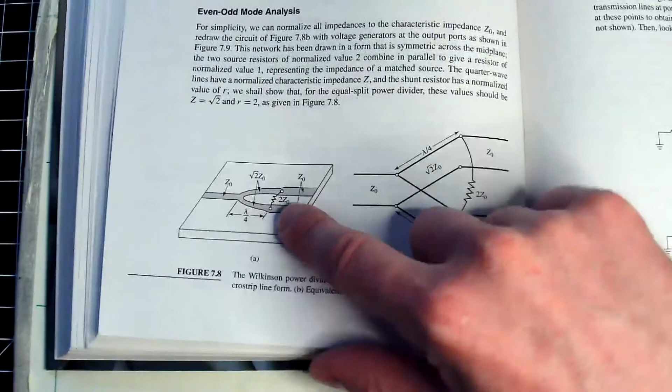And then to get the lower impedance, it's a slightly thicker strip. So this would be like 50 ohms, this would be something like 70-ish ohms, so a smidge thinner, and then it thickens up back to 50 ohms again. Then you would just slap a resistor across it right here.

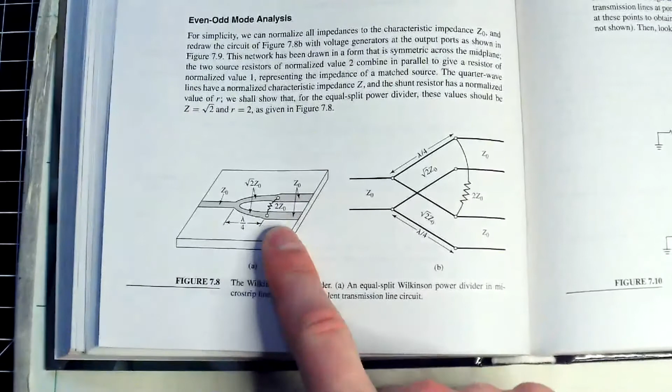I was almost thinking about whether or not it'd be worth trying to make this in real time, because theoretically the analysis is pretty straightforward. But I've got a board here, a soldering iron, and we have a half hour to kill. So what if we tried to actually make one right now? How would that work?

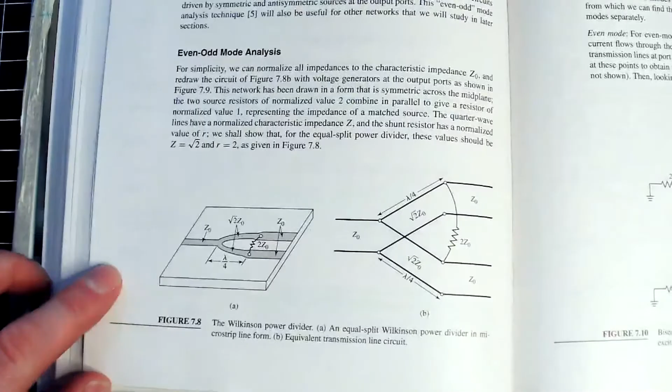So we'll go through the theory section. If we get really motivated, I can fire up the soldering iron and see if we can actually make something like that, and measure it with our nano VNA to see what happens. Or at the very least, I could get through half of it and we'll look at it Friday and see how that goes.

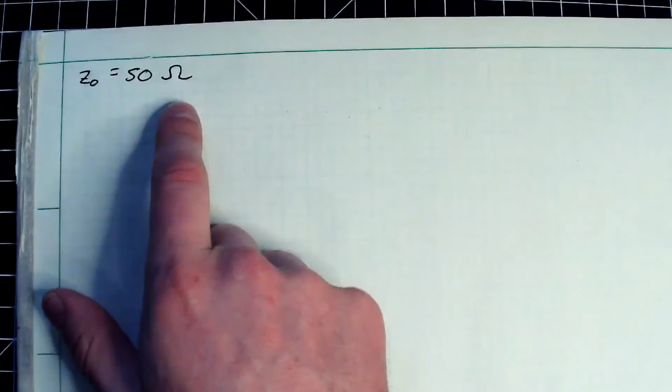So the question was, we're working with microstrip. The first thing we need to know is what the thickness of our microstrip is going to be. So if I have, say, a 50 ohm line... let me pull up, oh, I was supposed to say 50 ohms, I gave the center frequency but forgot to do the actual impedances of everything. So we're going to assume 50 ohms, because that's how everything is.

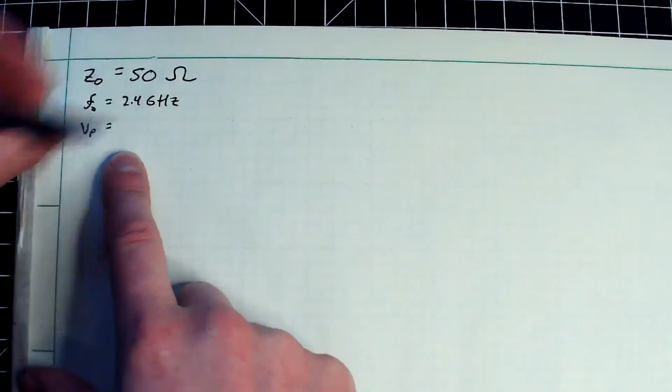We also know our center frequency is going to be 2.4 gigahertz, because that's where everyone's cell phones are. And we know, using microstrip, that at least for our particular boards, our propagation velocity was about 0.55 times the speed of light. That implies the wavelength is the velocity divided by the frequency.

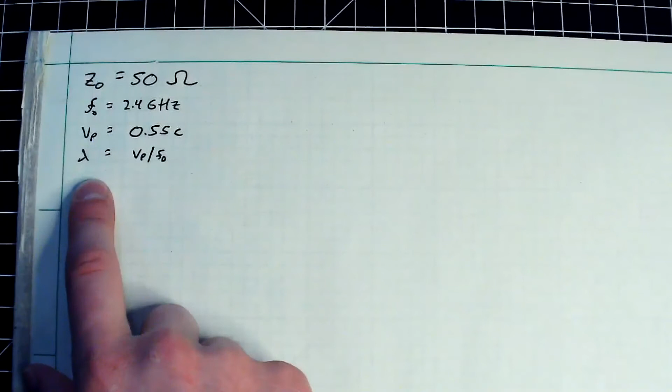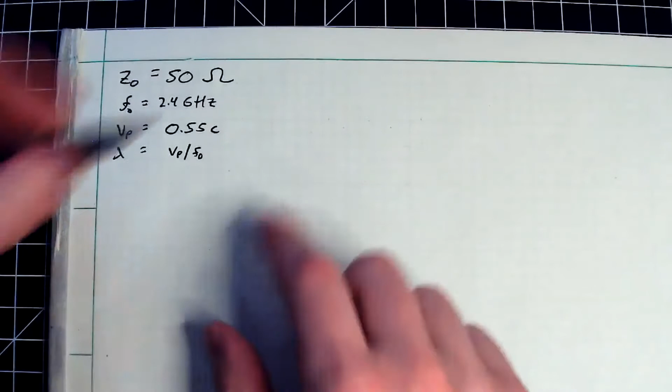We also know we're going to need a resistor. Sorry, I've got too much stuff over here. There's going to be a resistor R, that little bridge resistor is just going to be 2 times Z naught. So that's a 100 ohm resistor that's going to have to bridge that.

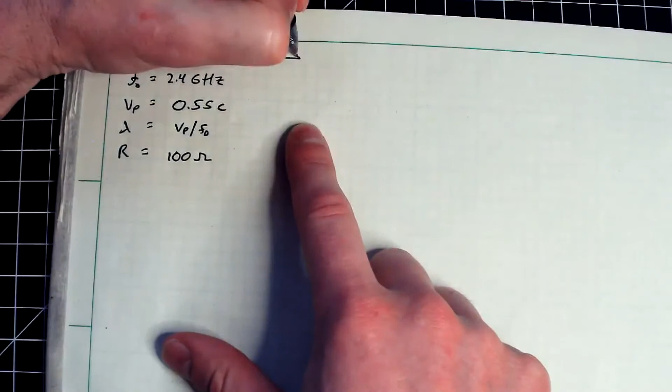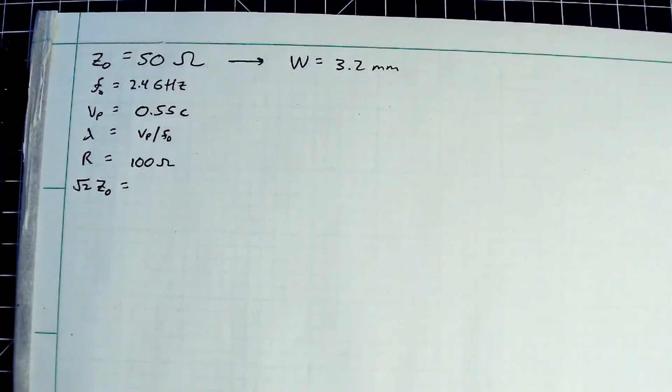And we know 50 ohms corresponded to something like 3.2 millimeters, 3.1, 3.2, I think that was about it. So then we also know the little bridge here has a square root of 2 times Z naught. Let me do a quick calculation in MATLAB: square root of 2 times 50 is 70.7 ohms.

So then the question is, what width do I need for my strip to get that? It's going to be somewhere like 2.5-ish millimeters, a little bit thinner, somewhere between 2.5 to 3, and we'll look that up in a second. And we also know that this length, this little branch here, has to be a quarter wavelength.

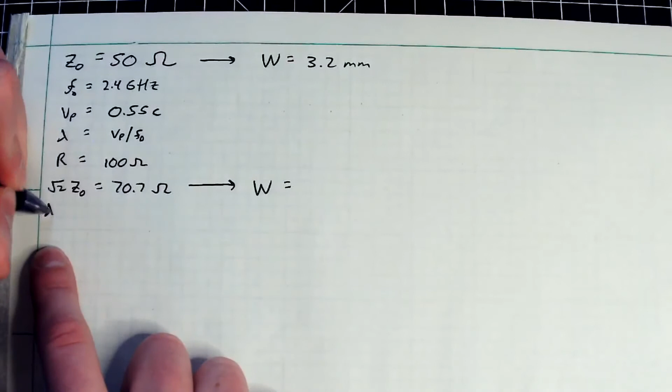So assuming the velocity of propagation doesn't change significantly, we know that lambda over 4 is going to be... well, we've got to calculate this stuff. So frequency is 2.4 gigahertz.

Velocity of propagation, so let's just write a quick little script file that does all this stuff. I'm going to open up MATLAB real fast. Are we on lecture 29 right now? Yes, okay, I'm in the right directory here. Let's do a little screen share.

Okay, so let's just find the model parameters here. We know our frequency was 2.4, velocity of propagation was 0.55, characteristic impedance was 50 ohms. What do we want to call Zx for the little branching guys? We'll just say square root of 2 times Z naught. And we need a wavelength, so that's Vp over F naught. Then L, the length of the branch, was just lambda over 4. So these are all the basic parameters here.

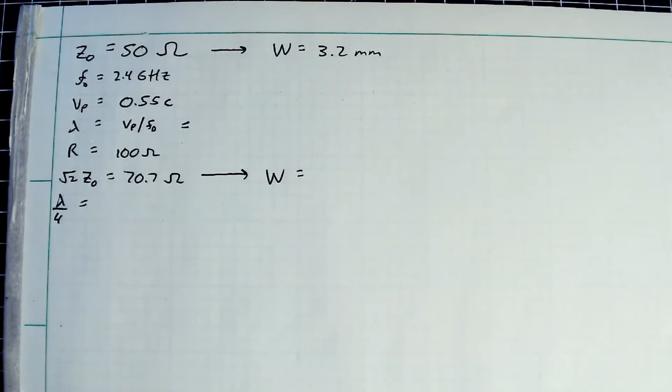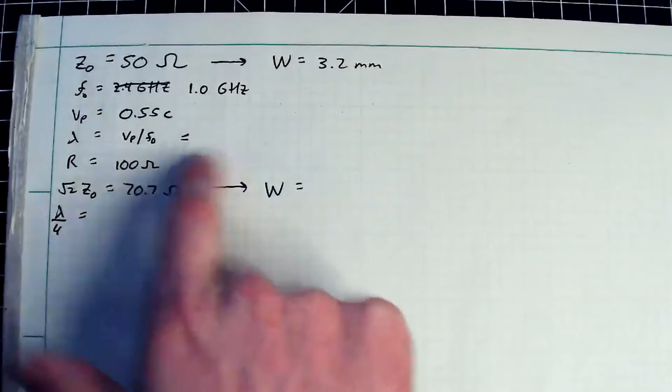Okay, so let's see, we're looking here. I'm going to cross that out, I'm going to put 1 gigahertz now, so the NanoVNA can actually play with it. And then lambda, here we go, so lambda became 16.5 centimeters. And so lambda over 4 is, there we go, about 4.12 centimeters.

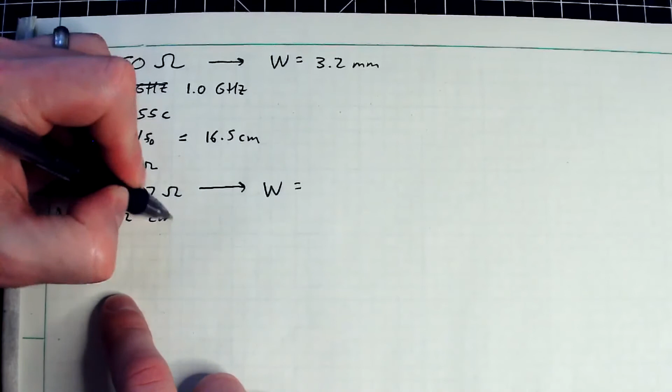So the final question is, what is the width here going to have to be in order to make that little guy be the right impedance? So now we've got to go back to lab 4, I think, where we did the microstrip. So I'm just going to run that real quick and we'll do another screen share.

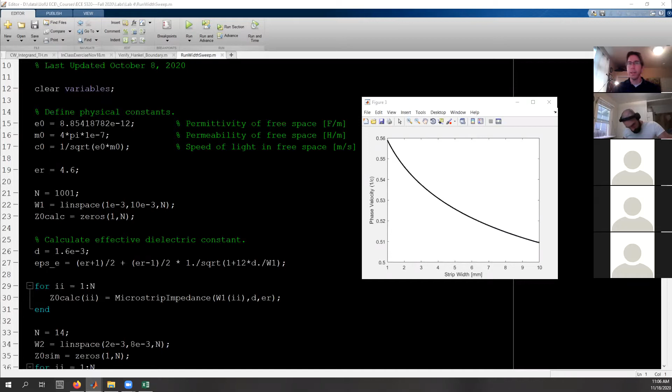So you remember this graph here? Nope, that was our phase velocity, so we can assume that's not going to change too much. And where the heck was that? There we go, so this was... I got all this goofy annotation all over that, so I'm going to remove some of that stuff.

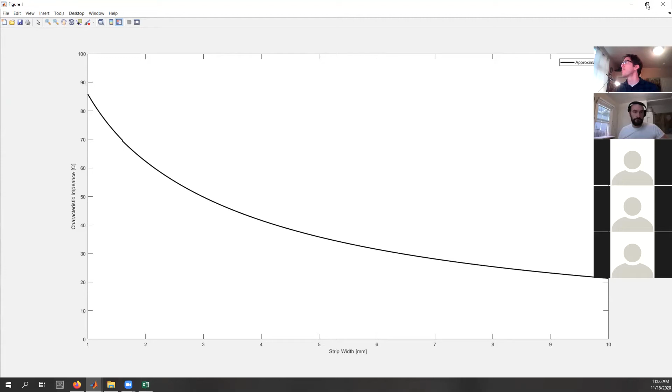Sorry, because I originally had it set up where it'd run a simulation, and I was kind of comparing against that. All right, so remember this, we had characteristic impedance versus our width, and we had about 50 ohms. And then we need to figure out... ooh, that's going to be really thin. I wonder if that's even doable with my bare hands.

So let's do a quick little check here. So there's my 50 ohms there. I'm going to do another one with square root of 2 times that. There you go, so you see there's our two little intersection points. Ooh, that's going to be tough. So you see, to get our 70-ish ohms, I'm going to need 1.5 millimeters. Ugh, I wonder if I can do that with my bare hands. That's going to be tiny.

But there you go, so we know that the width here had to be about 3-ish millimeters. So actually it's not quite... yeah. And then this guy is... we'll zoom back up. So we'll say 1.5 millimeters there, 1.5.

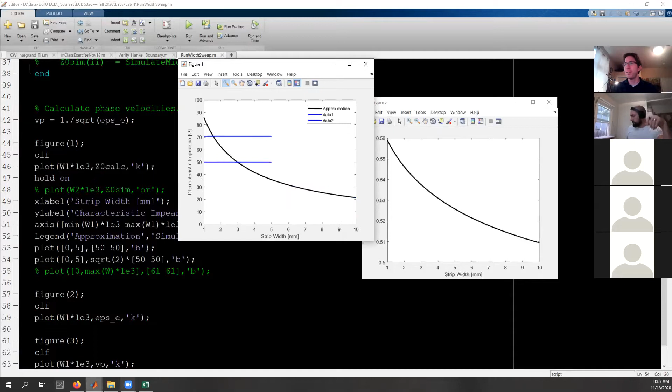Okay, so there you go. That's essentially a Wilkinson power divider in a nutshell - those are the parameters. So we'll go back here. This is everything you need to know.

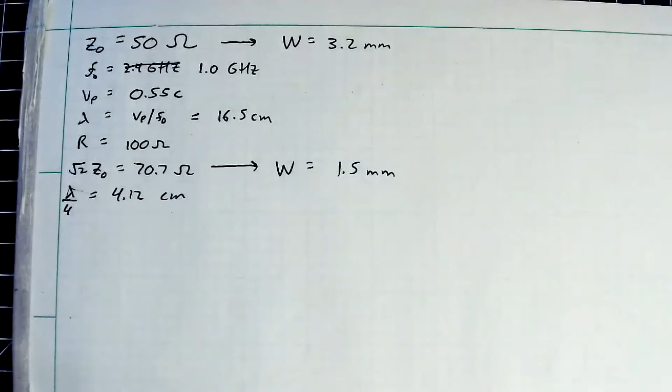You know that this length will have to be 4 centimeters, and these are the widths here. So let's see if I can draw this to scale. You'll have a width coming in like that - I'll call that W1 and W2. That's about 3 millimeters, 3-ish. I think I updated it with my actual dielectric constant, so I'm going to put about 3 there.

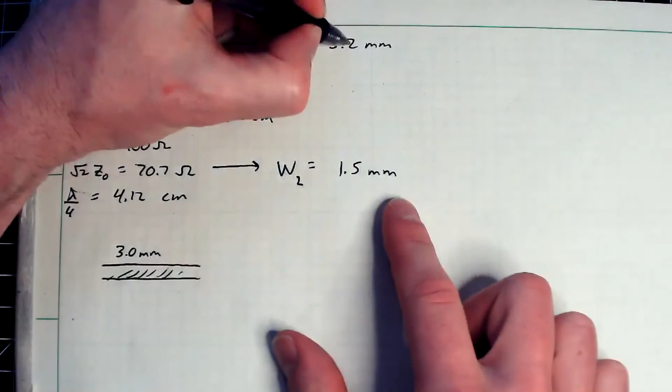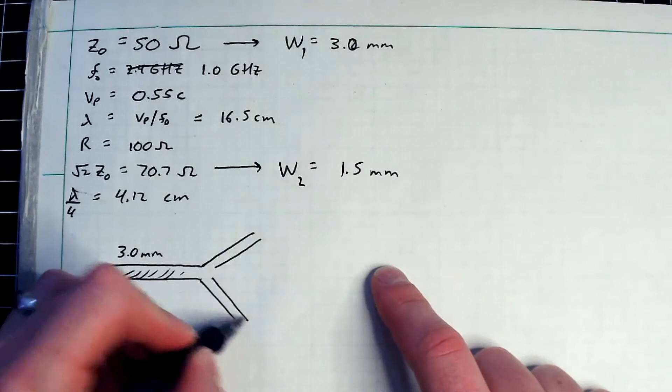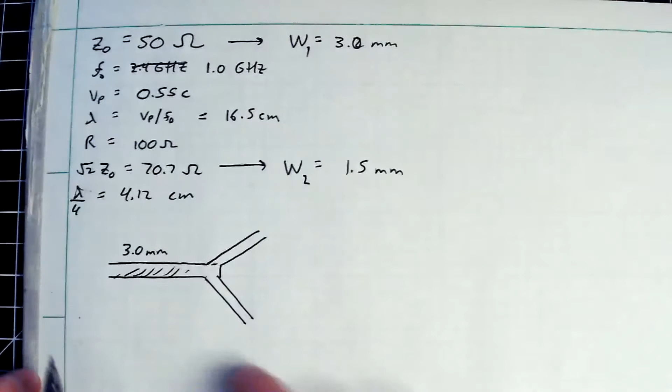And then you have to branch out, so you do something kind of like this. Like that, so you'd have these little branches. I wonder how much of an impact it has, where exactly those overlaps are. But usually this stuff is pretty forgiving if you're making it out of this material. And then you have another bit coming out basically like that.

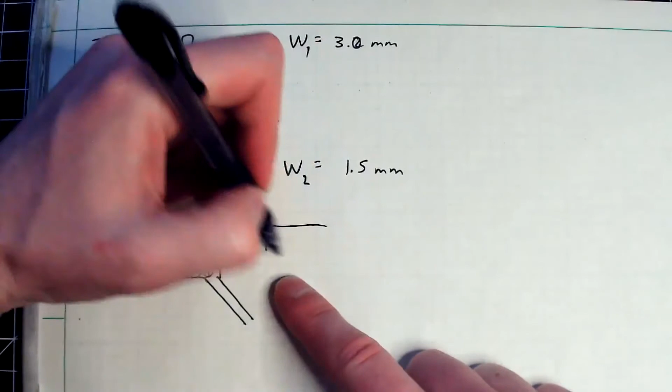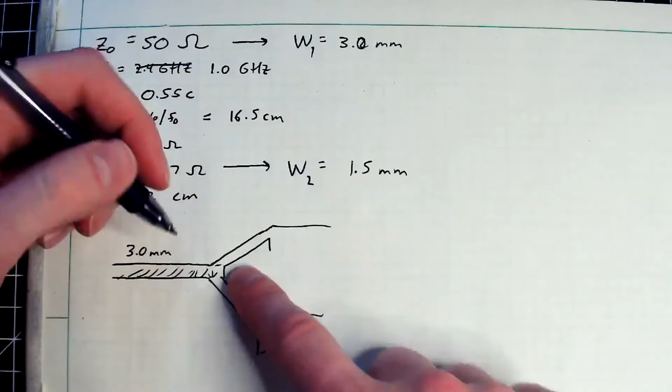I guess the book kind of shows it drawn more like this, so it would look kind of like that again - although I'm totally not drawing this to scale, sorry. This would be my thin section here, my 1.5 millimeter. Yeah, I did not draw that very well at all. So let's just kind of do that.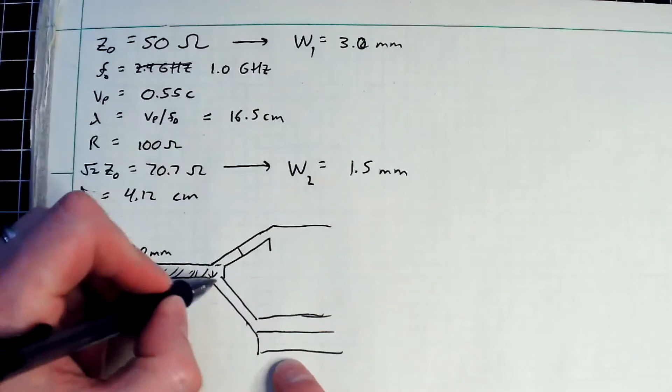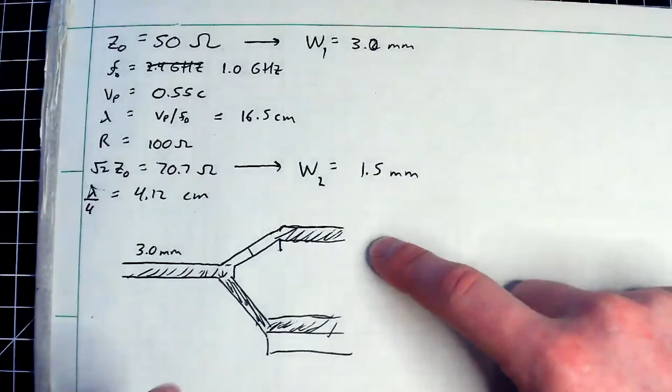Ignore some of these lines here. Like that - yeah, I kind of garbled that a bit. And then this kind of just goes on like that. And then what you would need is a big fat resistor here, just sort of soldering like that. That'd be a 100 ohm resistor, kind of like that.

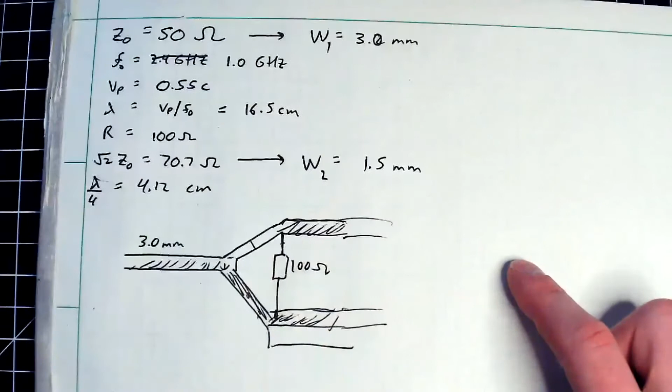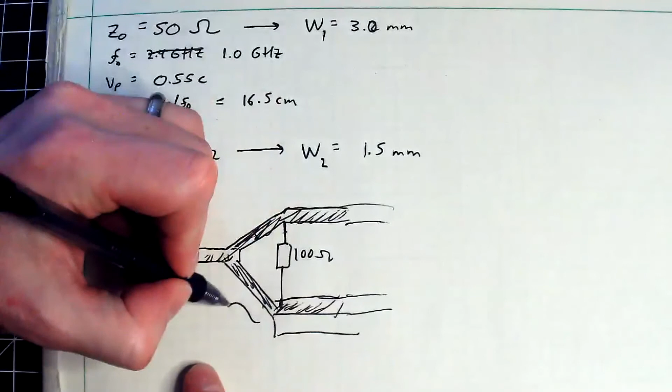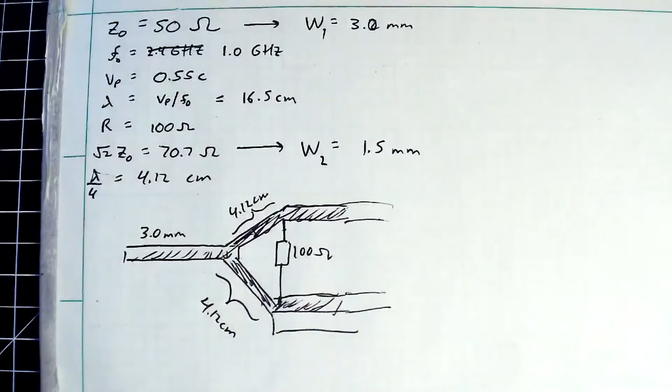So hypothetically, if I were to make this right now out of microstrip, I should get a pretty decent result. This would be about 4.12 centimeters like that, and then there's another 4.12 centimeters like that. Okay, and that's basically it - now you have a Wilkinson power divider.

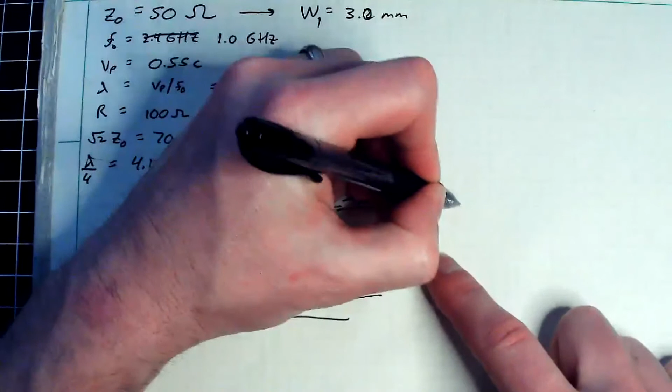And if you wanted to make this thing, you'd have to terminate this with 50 ohms here. So you'd put, say, a 50 ohm resistor here. And then what you would do is feed your nano VNA into this port, and you would excite a signal, and then you could measure your transmittance out to the other end here.

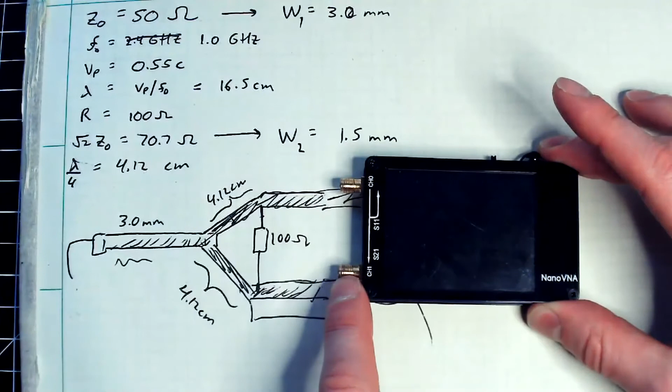So let's grab this guy here - you'd have your nano VNA. You notice we were measuring reflection coefficients with this port, but you can actually measure a transmission coefficient by just feeding from one into the other. So this would be your channel 0, and then your channel 1 would come out here. And that's it - you can just measure both ports.

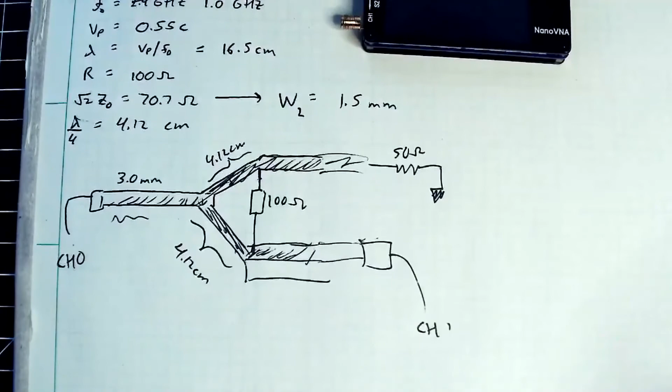So you terminate this one with, say, 50 ohms - you put your little 50 ohm load there and then measure this. And then you could do a little flip-flop, or send the signal the opposite direction and see what happens. And there you go - so you can see how pretty straightforward it is to make a Wilkinson divider here.

And in reality, you wouldn't necessarily use big, thick through-hole resistors - you'd have little chip resistors for this sort of thing as well. Oh, and that reminds me of one other thing.

So actually, Corey was kind enough to donate some images from L3 of some of their microwave networks here. So what I think I'll do is try and build one of these tomorrow and see how it goes.

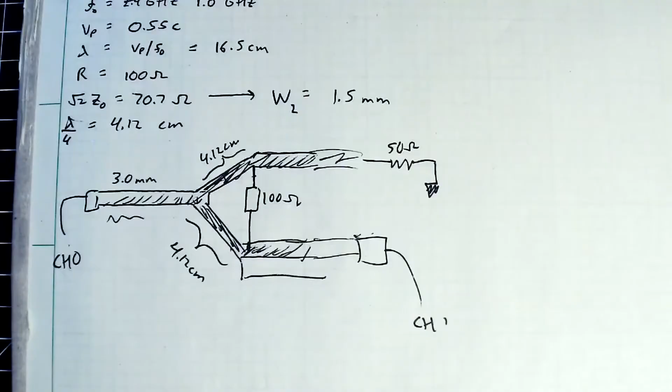Because making that 1.5 millimeter is going to be a real challenge, but we'll see how that goes. Let me see if I can find those images. There we go - am I still screen sharing? So I'm going to do a screen share. There we go, something like that.

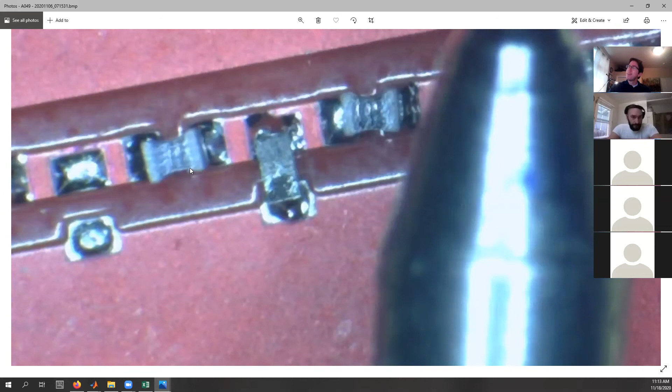Yep, if you look carefully, the ones that are running the length of the transmission line, those are inductors, and you can tell it's a little white plastic dog bone - you can even see because it's made from a little wire wrapped around that dog bone. And that makes it really difficult. Yep, you can kind of see the horizontal lines on it on the one closest to the pen, the pen head.

This guy here - you can kind of see how it wants to make horizontal lines. That's actually 3 wrappings of a wire around a plastic dog bone. So there's like a little copper wire, a little coil around this.

That makes those things a bugger to solder, because when you're doing it, if you accidentally bump it with your iron and one side's still soldered, you'll actually end up pulling that wire off of the dog bone. And then you've just invalidated its performance.

So these were hand soldered then? Yeah, and it's difficult, but it's not as hard as you think. This filter I soldered, and it was very close in its performance when I measured it, but that's good enough for me to send it down to another building and have a professional solder it.

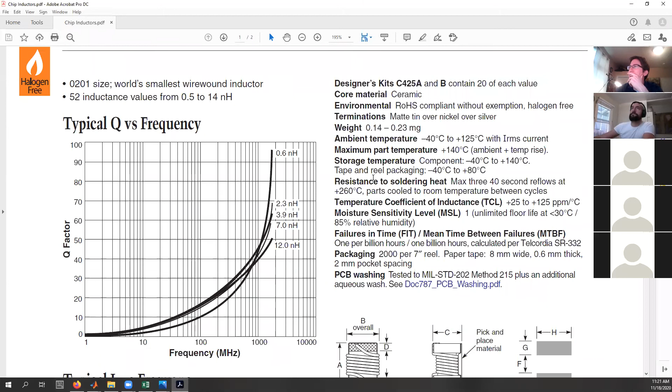Also, you sent me the data sheet - here's the actual specs for the chip inductors, so you see their Q factor. Those are nice little 0201s. Whatever width an 0201 is, that's the same as that trace. Is the 0201 on this data sheet? Yeah.

By the way, is that kind of what the picture looks like? There's this little wire sort of wrapped around there, and you're soldering to the tips. You can kind of barely make that out if you zoom way in.

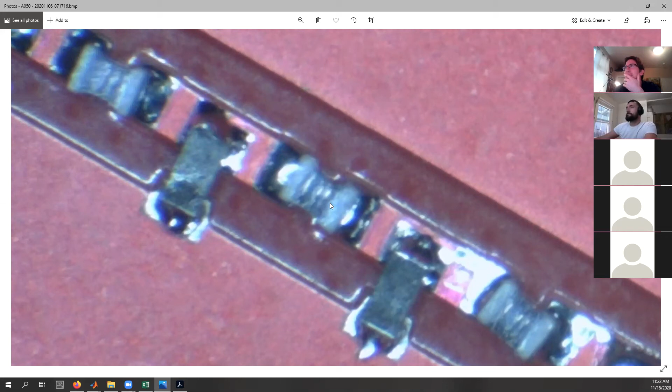You can almost see it, like there's a wire and a wire and a wire, so 3 turns on that little guy. It's probably all encased in some epoxy or something, I imagine. So it's just a teensy weensy wire with some contacts that you solder to.

Does it say here? So, 0.45 millimeters, is that really? That's what it says here. Yep, 0.5 millimeter. Whew, that's pretty impressive there.

And you said that's a 50 ohm line? Yep, so that would imply a couple of things. You see how there's copper here around it? That might have an effect depending on how close it is to the impedance. Is there a ground plane underneath, or is this the ground plane around it here? There's a ground plane underneath. Okay, looks like this is also ground. Yep, and I think there's a magic balance in between everything, because this is pretty industry standard.

The Rogers material that's printed on is of a specific effective dielectric that allows you to use a trace width equal to that of an 0201. And then it also makes it so that the coplanar microstrip gap you have on the side is also the span of an 0201, for the very purpose of making stuff like this. Because everything looks like it's just matching up perfectly, it's because of that dielectric. These are industry standards that everybody comes up with, and I know very little about it, I'm learning as I go.

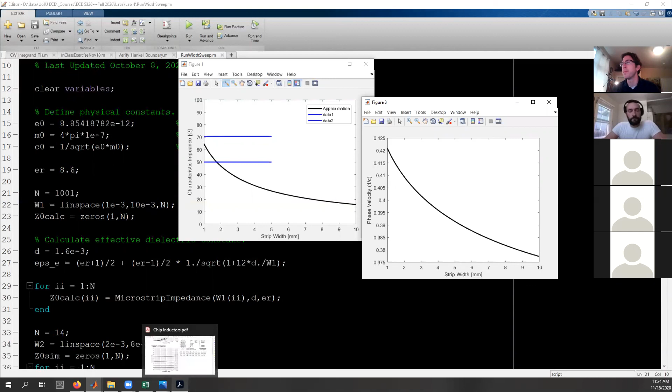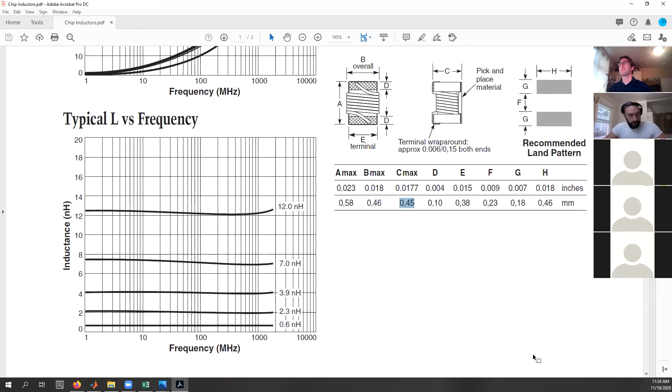And adding those ground planes around will probably also lower the impedance. In fact, it should increase the capacitance, and impedance is the square root of L over C, so that would lower the impedance, which means you'd need a smaller trace to bring it back up. Okay, all my intuition driving there. So there you go, that's a nice, fun little exercise.

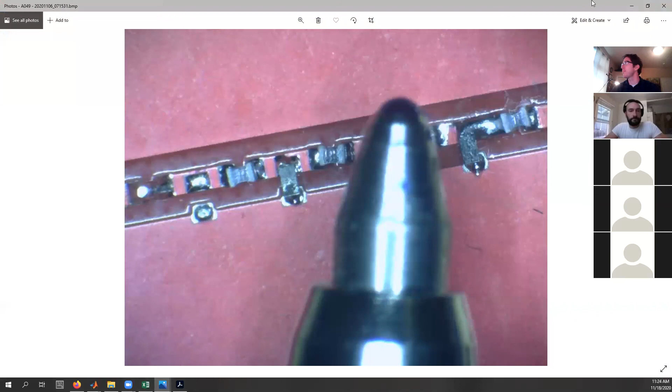Okay, but that's pretty much all I had today. I wanted to say thanks for sharing that, because that's a nice insight into some of this stuff happening in real life. And in particular, I kind of feel bad that we didn't quite get to do Chebyshev filters, because we did the binomial, and right there in the textbook is Chebyshev filters, which is exactly what you said this is, right? Yep, we just didn't do it out of stepped impedances.

It looks like you did it out of lumped elements with a ladder, it looks like. So if I look at this again, it looks like you made that out of just a ladder of inductors and capacitors, not out of stepped changes in characteristic impedance on the line. Is that right? Because mathematically, the result is still kind of the same, there's just different ways to approach it. So that's pretty cool, okay.

Yeah, on this one, my mentor just gave me a solver, and he said punch in the numbers and how many segments you want, and it'll spit back the values at you. So I dutifully did that, and it met my design requirements. But yeah, that's interesting, I'll have to look at that in the textbook.

Oh yeah, because in the textbook, we do it with little steps in the characteristic impedance, like the binomial filter. So you'd go from 3 millimeters to 3.2 to 3.4, stepping small if you want high impedance, or stepping bigger if you want lower impedance. This one's made out of lumped elements, inductors and capacitors, but mathematically it still has that same equal ripple behavior, so it's a Chebyshev filter, a low pass filter there.